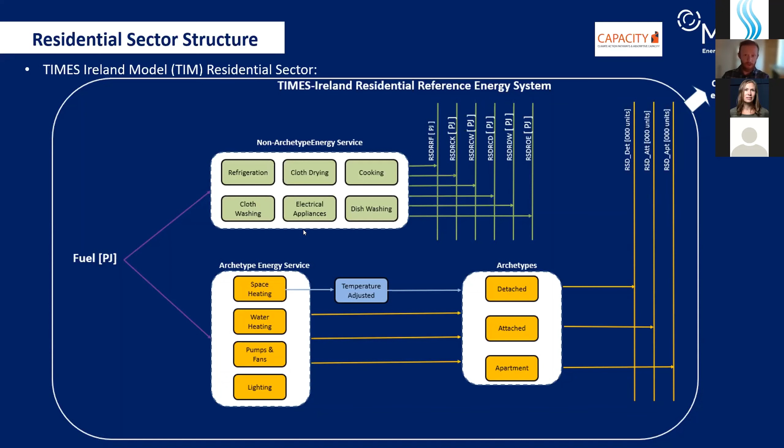So just jumping into the BER database itself. So the BER database accounts for over half of all the houses in Ireland. So it has lots of information, has 11 different archetypes, has loads of different heating fuel types, it also lists the heating system efficiency and lots of other variables. We went through this database, not just us in UCC, but we talked to other universities and other industries around Ireland, just to try and filter this data so we could get some of those outliers out of there and better reflect what's actually in Ireland.

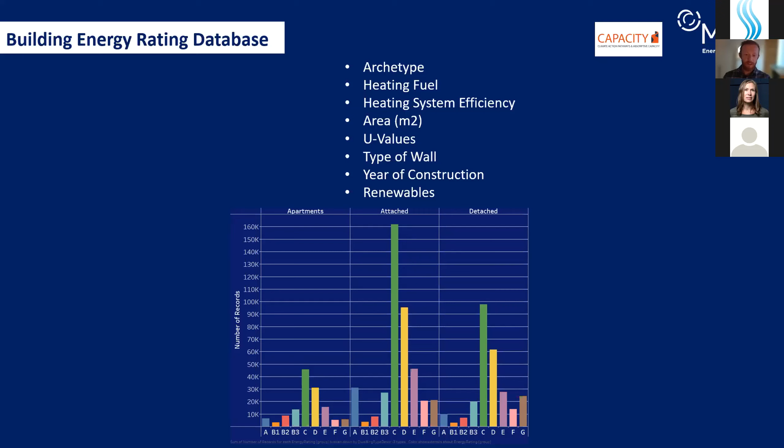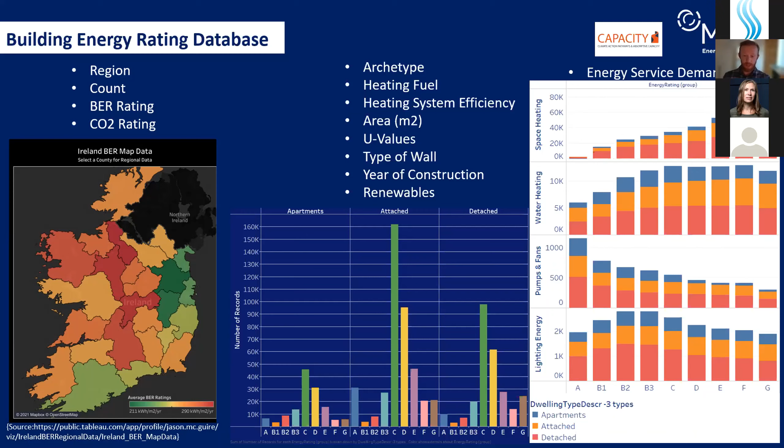So some of the other stuff that is quite useful in this database is we have the different regions. So we have the count per region, obviously the BER rating itself, and then also the 3 archetypes that I talked about. They are disaggregated in this database, so we can get a quick overview of the energy rating and the energy service demand, and how much energy is demanded per archetype and per rating. So all this data was essentially filtered first, then put into the model, so we could get a good starting point.

In terms of the residential decarbonisation in Ireland, 2 of the key components are both retrofitting and heat pumps.

And one of the problems that we had to deal with was trying to connect these, because we can't put heat pumps into poorly rated houses because they won't work, but also the fact we don't need to retrofit every house to put heat pumps into it.

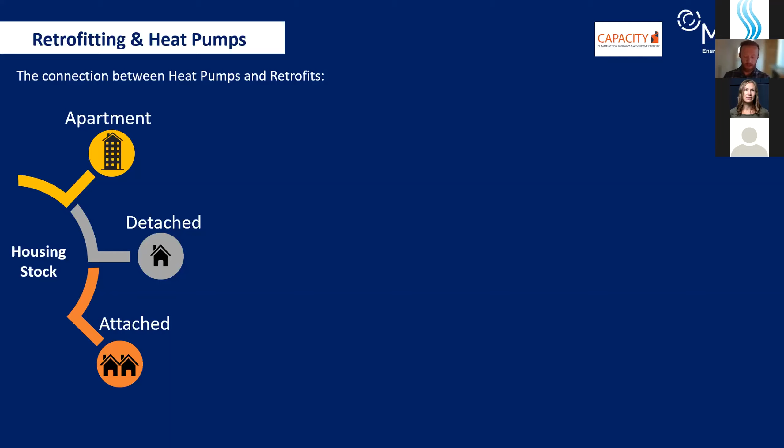So showing you an example in the apartments, this is how we've done it. So we have a shallow retrofit and a deep retrofit, and we've applied a cost to that. And then we also have applied a space heating savings. And from that, we can go over and see the requirements for the heat pump.

So in apartments, 24.5% of apartments don't require any retrofitting. We can essentially just put a heat pump in there. And then 28.5% will require a shallow retrofit before a heat pump goes in, and 47% will require a deep retrofit. And we've done this based on each archetype.

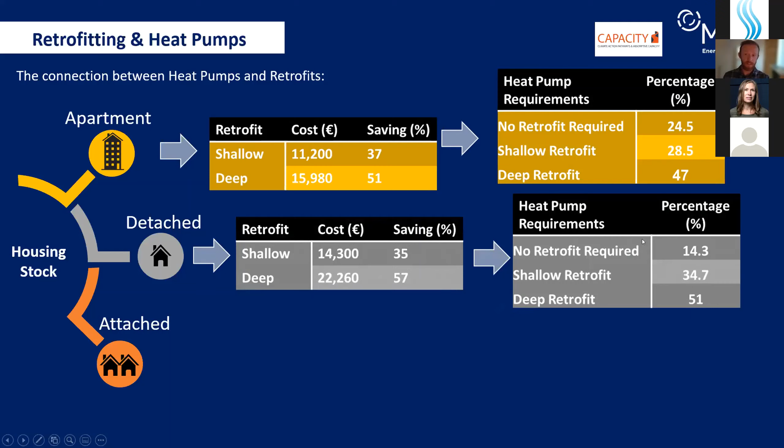So detached, shown here, it's more expensive, but also we can see here the no retrofitting required is much lower, it's 14.3. So this sort of illustrates the fact that the detached houses are older and of poorer quality than the apartments. And we also did attached, which is quite similar to detached, but a bit cheaper.

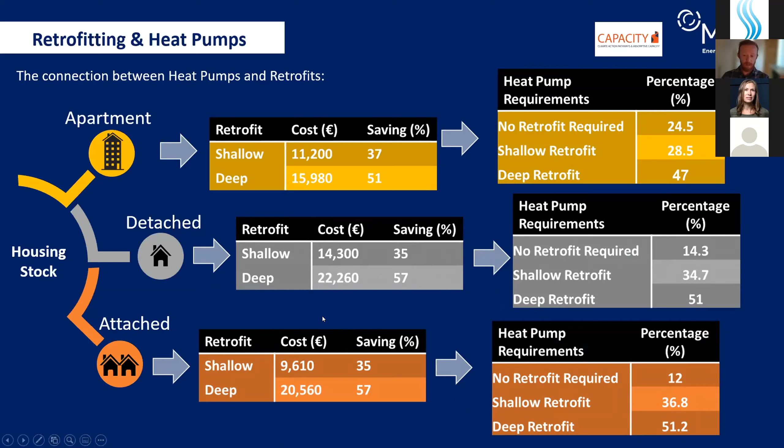And then if we just jump into the demands. So I talked a bit about the demands on the schematic. So this graph here shows, the blue shows the existing apartments, the orange, the existing attached, and the green is the existing detached, and up here are the new buildings. So in 2018, we expect to go from about 1.7 million to, in 2050, about 2.6 million.

But also what is worth considering is the amount of apartments in 2018 compared to where we expect the apartments to be in 2050. So we expect a large growth of apartments. And one thing that we want to look at is how this will affect the demand in the residential sector.

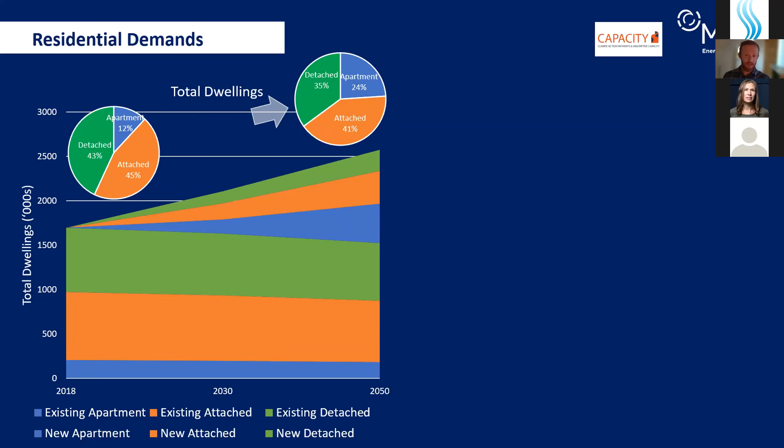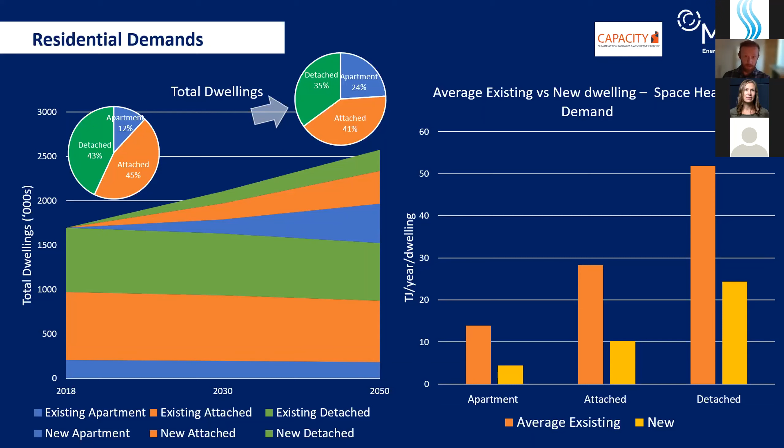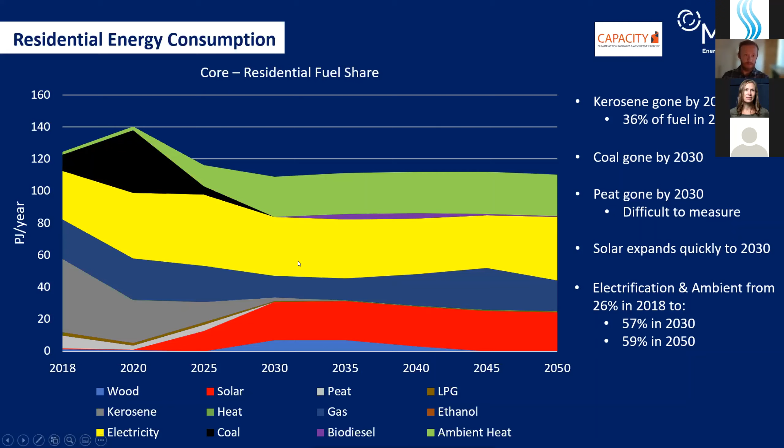Just looking at the retrofitting in the results, as I said, the retrofitting and heat pumps were two of the key components in decarbonizing. So in our model, we put a constraint for the maximum retrofits before 2030 to be 690,000. So this represents 60% of the existing housing stock. And then we allowed that to go up to 1.15 million by 2070, which is 95% of the existing buildings.

In this, the model decided only to retrofit detached and attached. Apartments weren't retrofitted. This is probably partially got to do with the fact that apartments don't have too much of a demand in space heating, and also they're not significantly cheaper.

So when we compare our 2030 retrofits to our 2050 retrofits, again, we can see that most of the work is done before 2030. So in our detached, we have 176,000 deep retrofits and 119,000 shallow retrofits. This grows a bit after 2030, but our attached is pretty much the same. So nearly all our attached buildings are retrofitted before 2030.

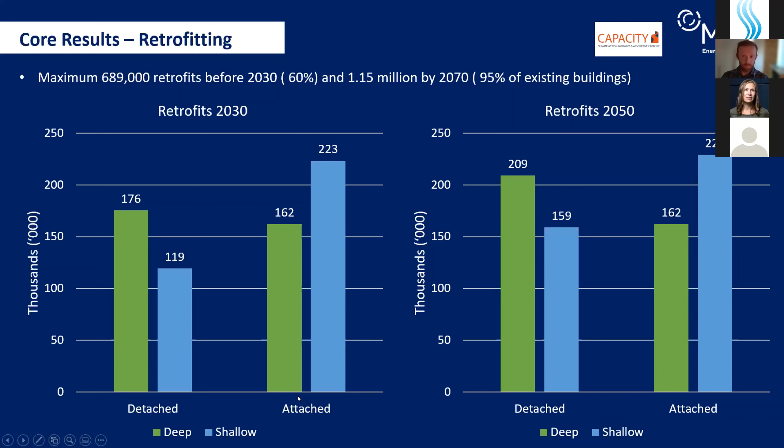And just jumping into the results for the heat pumps. So in this, we've seen that 411,000 heat pumps are installed into detached buildings. Now these are both existing detached and new detached. We didn't disaggregate between them, and we got 390,000 in attached and 25,000 in apartments. So we have a significant amount of heat pumps. Ireland's old target was to get a total of 600,000 heat pumps before 2030. These results show 826,000. So there's a significant share.

This is a share of heat pumps, both the ambient and the electricity combined, that feed into the water and space heating by 2030. So we expect about 41% of water and space heating will be from heat pumps.

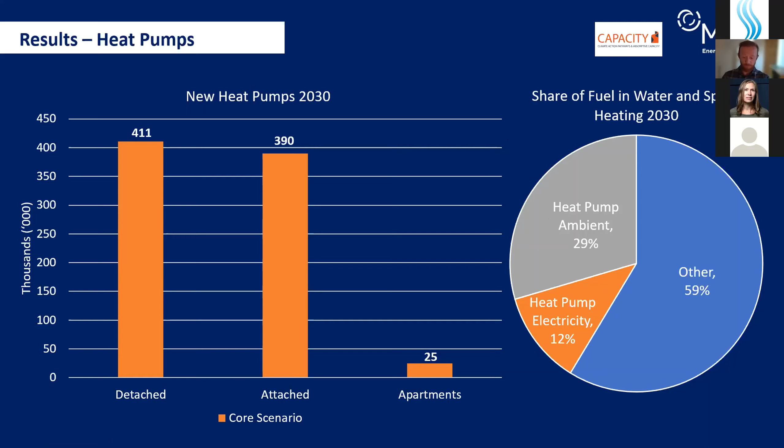So just some of the insights from the residential sector in this new TIMES Ireland model. We see 680,000 retrofits by 2030, 826,000 heat pumps. One thing that I thought was interesting was the similar amount of solar water heating when there was no constraints. So I thought that was quite interesting, because it seems to me like it's a low-hanging fruit. Also, coal and peat are gone by 2030 and kerosene gone by 2032. And there's a high electrification in the residential sector.

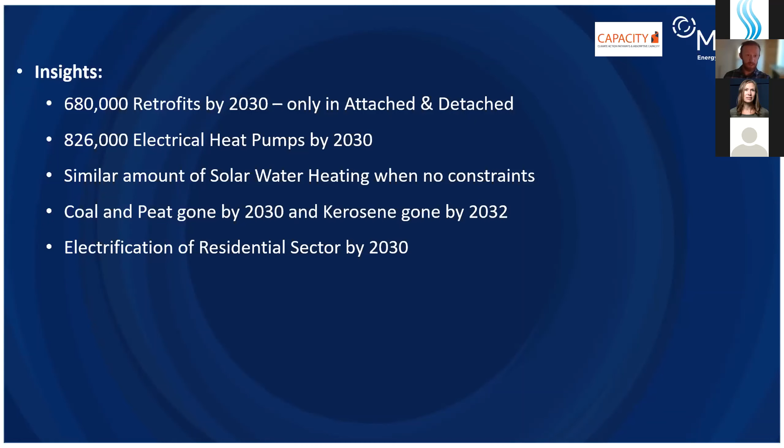And what we still have to do: we've built this model, we finished it this year, we still have more work to do. One of the things on the residential sector especially is to improve the district heating. Also to disaggregate the BER labels, so between A to G, would be quite useful to explore the optimal sequence of retrofits, and also to explore the gas decarbonisation. In our model, we had gas going down about 20% in 2030. But this was natural gas. So it'd be interesting to explore what would happen if that gas was decarbonised. Would gas still be used more?